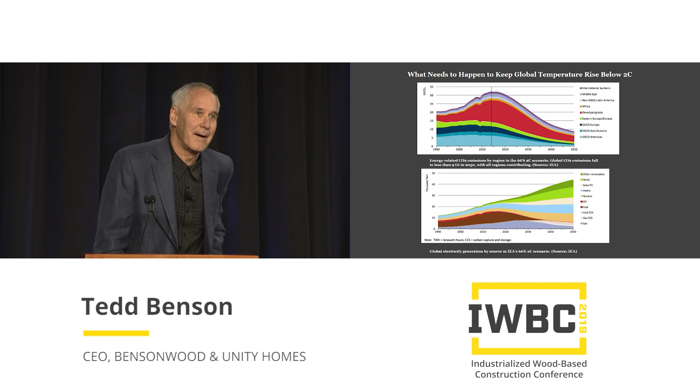This is what has to happen, and it's really incredible, and it's kind of frightening. On the upper image, that's how much CO2 emissions have to be pushed down. That's the change we have to make in the next 20 years. And on the lower slide, that's how much we need to increase the use of renewable energy. If we put those two together, there is a solution somewhere in there. We're late getting started.

Buildings are, of course, you've seen this before, the number one problem, the biggest part of that sector. And it's crazy. The buildings don't go anywhere. They just sit in one place on the earth. And all we have to do to fix buildings and make them green and not consuming so much energy and belching out the CO2, all we have to do is reduce the energy that they consume by insulating them and making them more airtight. It's really just about that simple.

It's crazy. If we can't do it in this sector, who is going to do it? Where is that change going to come from? They're not flying across the country. They're not traveling down the road. They stick in one place, and all we have to do is build them in the right way.

But look at these codes. I got this from the Rocky Mountain Institute. This is the free market speaking, I guess. And so at the top of that is where the building codes in this country have been. And the members of the NAHB, who many of you might be members, I quit. They complain. They complain about those codes. The 2015 code is kind of stiff. Ooh. But look at where it is. It doesn't move the needle.

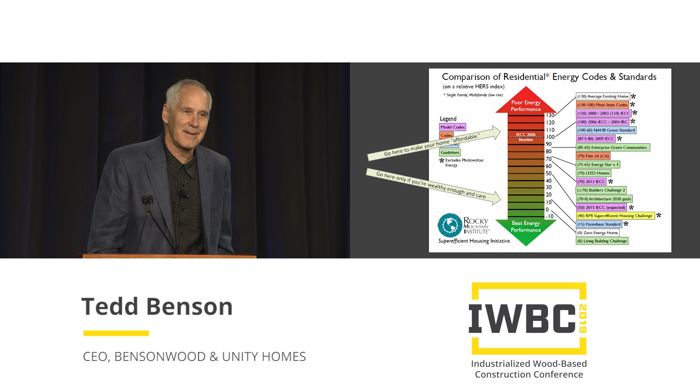And so, if you want your home to be affordable, you're going to be at the top there, belching energy. And you can be at the bottom and really do the right thing if you're wealthy and care. That's not right. That's not a country and an industry that's going to change things. You can't allow that chaos of which code and standard are you going to adhere to? Just whatever you want? What your local building official requires? It's not good enough. You know that, and I know that.

And if we want to change it, and this is the reason why builders across the country complain, it's because the industry is so challenged. We're repeating each other here, but we've got built-in inefficiency, skill degradation that's just getting worse. You know what skills you need to have to be a carpenter in this country? None. Nothing. No schooling, no nothing.

I got a haircut the other day, in preparation for this, I wanted to look decent. And the lady who was cutting my hair told me about her training and the education, what she had to do to get her certification to be able to cut my hair. Unbelievable. Ongoing education too. Where she's employed, they require her to get updated every year. In our industry, it is nothing, nothing, nothing. That's the challenge of an industry.

Why do we have poor quality? Well, it's embedded in the methods and the skills. This is redundant too. Andrew showed a similar slide. And we both are quoting from McKinsey. Andrew likes the graphs, I like the words. So in the United States, since 1945, productivity in manufacturing has gone way up. I think all three of us repeated this, 1,500%. And in the construction industry it has barely moved. Here's part of the reason why.

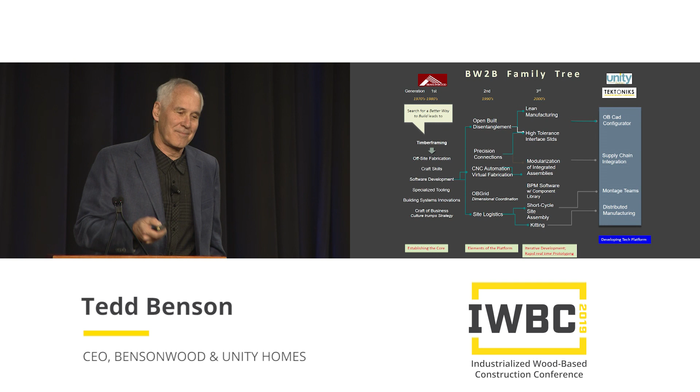So when I'm giving tours around the company, I am always asking that person doing the work to talk to whoever I'm touring, because they know more about that, whatever it is, than I do. That's off-site. We've been deliberate. We had a mission starting in the 70s. We've been on a path to develop methods and systems and thinking and training. And so this is our family tree, better way to build family tree. I won't get into it, but you can see it's been a thing that we've been doing, and doing it very deliberately.

We've also been learning from everywhere. We've had the good fortune of bringing in interns and tradespeople from Japan, France, Germany, and other parts of Europe. We've also traveled the world to where the very best building is taking place. So that's Scandinavia and Germany and Austria and Switzerland, Holland. There's some amazing stuff going on in thinking about new methods of building.

And our French compagnons have taught us an immense amount. A Japanese temple builder joined us for a year, changed us radically in that year. Because he learned from the person who learned from the person who learned from the person going back 2,000 years. And we were relearning. So how? Aim higher, engender a proud culture, use advanced technology, lean the process, apply rational building principles, and develop a new industry-wide operating system. So that's the bridge.

I think a bridge is a good metaphor because there are many parts to a bridge. The technology is just the deck, but we have abutments, we have arches, we have struts, we have a whole structure that is needed to create that bridge. It's not one thing. You can't just bring in technology and use that to replace your labor problem. As a matter of fact, the way you should do that is to use it to lift the labor and then just call them skilled, valuable, wonderful people that you're lucky to work with.

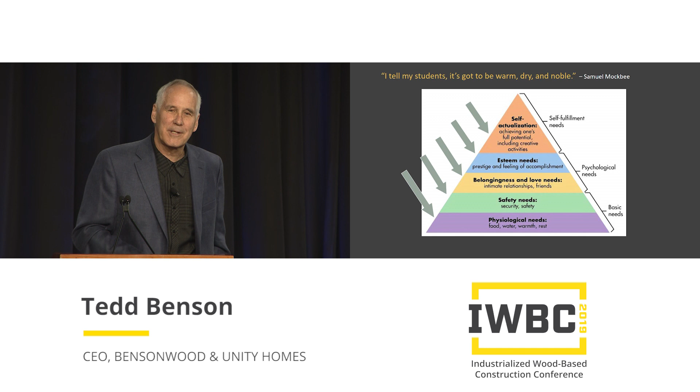What about what I got when I was growing up in that wonderful building that was a bit of a mess, but it was well built, had good bones, had good craftsmanship. And I could stare at the ceiling as an 11-year-old and know that I mattered. What about that? What about that? Why can't we aim for the top of the pyramid? Homes are sacred places, and we should treat them that way.

And here's my rant about the code again. Come on. The code should not be all over the place. It shouldn't be whatever you want to do and whatever the local jurisdiction decides is good enough for them. We're one country, and everybody deserves a decent place to live. I think it's criminal. It's criminal that the code that was off the chart in that earlier slide was a HUD code.

The HUD code is what you can do, what you can get away with when you're providing housing to the lowest sector of our society. You can get away with that, the HUD code. And it's criminal. They're toxic places that are energy gobblers, for as small and inefficient as they are, they're also just a terrible place to live. And we allow it in this country. They don't even appreciate, those homes. So it's a bad investment for their life, and it's a bad investment for their economy.

There should be one code. This is a code that Unity adopted. That's our standard. We call it the good code. And I'm not sure it's exactly right, but it's a little higher than Passive House, and it's a lot lower than some of the other standards. And I think the good code should look like that. And if we don't have the right one, let's get some smart people together and establish a good code.

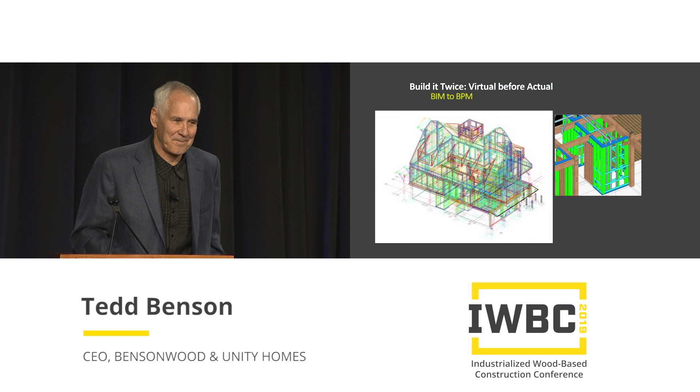That means building things twice, using software. We believe deeply in this. We call it virtual before actual. And it's not just a BIM that we're after, it's a building production model. It's a building model that is already oriented for CNC fabrication and automation. It's built into the software. That's what we believed in. One software for designing, developing, and manufacturing. And that allows us to point it directly to CNC automation, where we get incredible efficiency and incredible accuracy.

We got our first machine in 1997, another one in 2006, I think, and the new ones that we have today. But the big thing about that is the connection to the software. That's the big thing. The software is it. The machines you can buy, the software takes a lot of time to develop.

Lean the process. Lean is the most dramatic change in manufacturing in the last 50 years. And all industries do it. And it is so powerful, it is so useful, it is so incredible for all of us as we think about how we gain efficiency. It's also empowering, it's a bottom-up idea. Unfortunately, if you're going to learn about Lean, you've got to learn a little Japanese, because

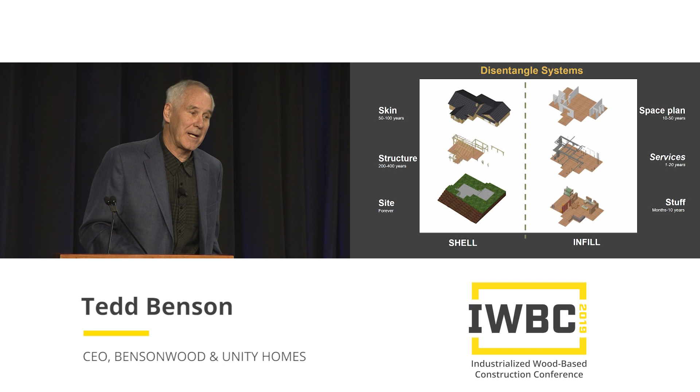Modularity. Modularity is how every other industry achieves its innovation, its production efficiency, its constant improvement, given the computer on the right or the appliance on the left, because the components and the whole entity can iterate at different levels. And you can have different suppliers for different components. That's how the computer industry changed radically from the 1960s till today.

Just in the 1980s, I bought a computer for $6,000 to do some programming we wanted to do. Today, you could get that same computer for $100. That's an industry democratizing their product by using the power of modularity. The same thing with the appliance. One of the most advanced things in your home are your appliances. They don't break. Dryer, dishwasher, and they're running all the time. The home underneath it, there's a problem. So this is a really interesting book called Design Rules: The Power of Modularity, and how that has affected every other industry.

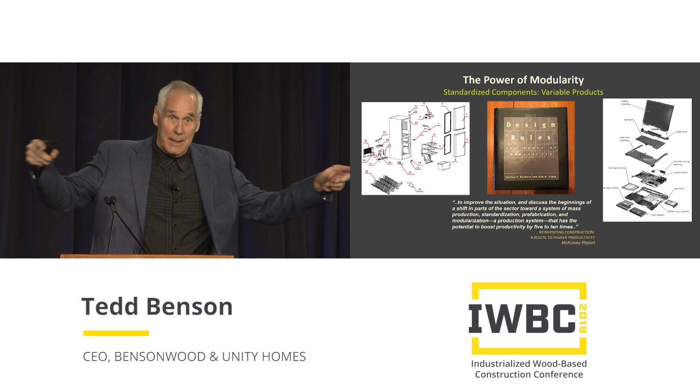Standardized components, variable products. So here's my other quote from McKinsey, since they're not here. Too bad. To improve the situation and discuss the beginnings of a shift of parts of the sector toward a system of mass production, standardization, prefabrication, yes, prefabrication, and modularization, a production system that has the potential to boost productivity by 5 to 10 times. We need to do that. The industry needs to do that. We need to change everything. Not us, which we have. We, the industry, need to take that on.

And what about clothes? We accept that as standard. It's standard sizes. Before there were standard sizes, you had to go to a tailor. Now, it's produced all over the world at very, very cheap prices. Why? Because they accepted dimensional standards.

Little short personal note, I wear size 34 waist. And I won't buy myself a 36. That's my dieting method. And today, I could only find one pair of pants, so you're lucky these are not sweats.

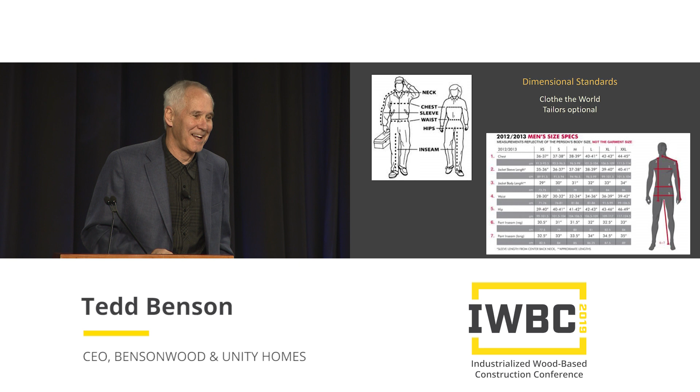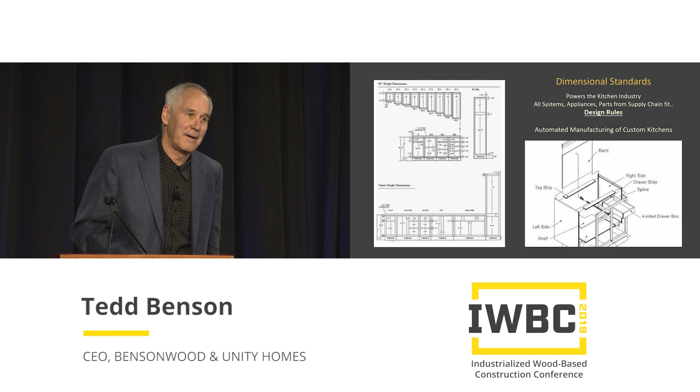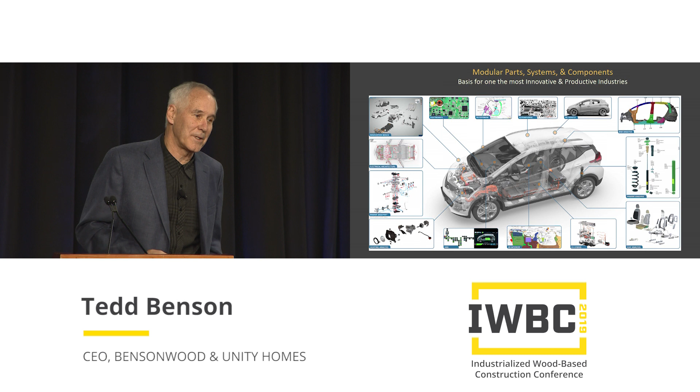Another industry, the kitchen industry, has standardized everything. And it's changed the industry. You can go to a lumber yard, open up a drawer, and it's likely it's hardwood and dovetailed. Why? Because they did that. And the automobile industry, which we keep talking about, has modularized everything. Every part and piece, every component, it's a modular system. Whether it's the upholstery or the heating unit, the mechanical system, the sound system, it's all componentized and modularized. And so, for $18,000, you can get that. In our industry, you can't get that. You can't.

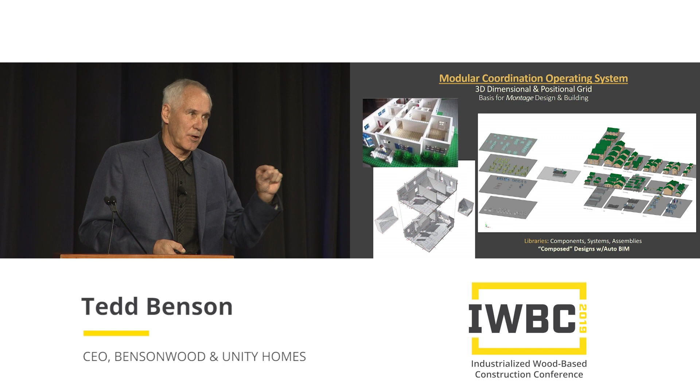And so we're proposing a modular coordination operating system. We've been using it for a lot of years. It's changed everything about what we do. It's the basis of Unity. A three-dimensional and positional grid that's the basis for what we call a montage design and building system. Leads to libraries of components and systems and assemblies. So you can compose the designs and they go automatically to the BIM. They are a BIM.

The word montage, which we're adopting as the new part of our lexicon, means a combination of disparate elements that form a unified whole. Montage was actually used for dimensional coordination in Europe, and a Danish architect, Christian Bundegaard, has written about bringing it back. And she calls it a way of thinking about architecture as an instrument rather than a monument.

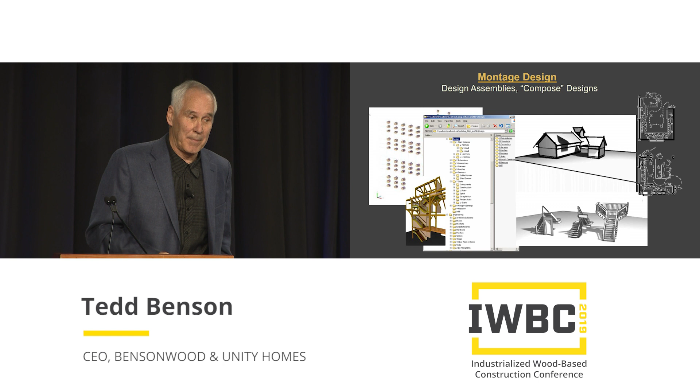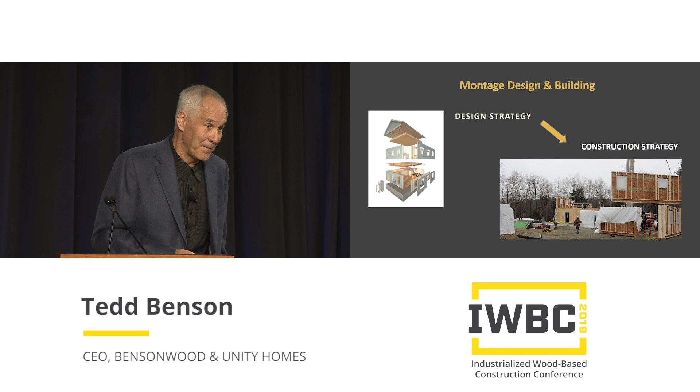So this is what it looks like for us, where we're designing assemblies and we compose designs. And that leads to integrated building elements, stairways, mechanical systems, bathrooms, panels, kitchens, floor panels, roof panels, structures, everything in the building can be modularized and standardized. And so the design strategy, the composing part, is paralleled with the construction part. You design it with the same components that you construct with. They're the same. That's why it's a montage.

And it leaves a site for assembly only, where defects are unacceptable, and we can get to net zero ready automatically. By producing offsite in the way that we do and standardizing the components, nearly every building that we put up achieves passive house air tightness standards. We've lowered the insulation standard beneath passive house, but the air tightness is free.

So under Unity, we have variable platforms and standardized components. It's the Värm platform, with the library of actually about 150 to 200 components, and therefore huge variety out of that. Trad platform, same thing. Library of components and elements and options. So that leads to this new operating system. We actually have an investment partner with Certainty to develop this, which is going to be an app for that.

And so it's going to be a 3D open source software with what we're calling OB grid modularity, leading to integrated building elements, systems, and components that can align the industry. All of the industry, using a configurator as a basis. So you can configure buildings efficiently and effectively as an architect or as a builder or developer, professional designer. And then all of that data and all that information can connect the industry in a powerful way. I got the idea from this previous presentation that I think the configurator ought to be a game. Then we can get the next generation to be involved.